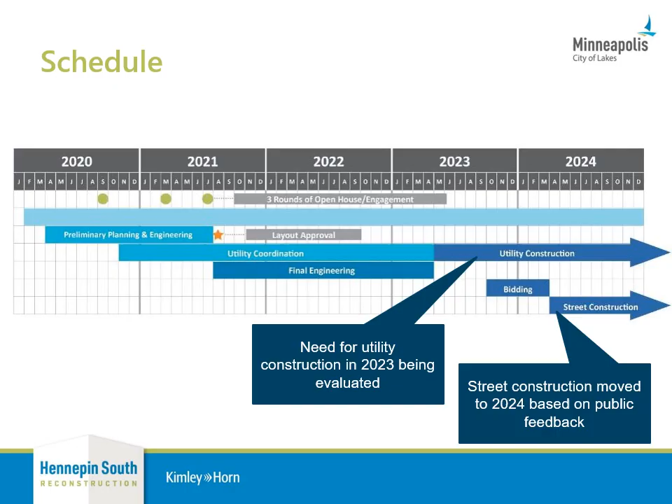Beginning with a brief recap, this is a reconstruction of Hennepin Avenue from Douglas Avenue on the north to Lake Street on the south, about a 1.4-mile segment. Hennepin Avenue is the ward boundary between Ward 10 and Ward 7, with Ward 7 on the west and Ward 10 on the east. There are 3 neighborhood organizations that directly abut the corridor, 2 special service districts that serve the businesses along the corridor, as well as 1 business association. There are varied stakeholders, including commercial users, residents, and many others that currently use the corridor as a means of getting to and through the city.

The Hennepin Avenue reconstruction project objectives begin with improving the sidewalk and intersection for all users. This includes installation of durable pavement markings at crosswalks and supporting pedestrian activities along the corridor with space for plantings, landscaping, and furnishing zones where feasible.

The recently adopted Transportation Action Plan identifies Hennepin Avenue on the pedestrian priority network. Evaluating bicycle network connectivity, the city's Transportation Action Plan identifies Hennepin Avenue between Franklin Avenue and Lake Street as a near-term, low-stress bikeway on the AAA network.

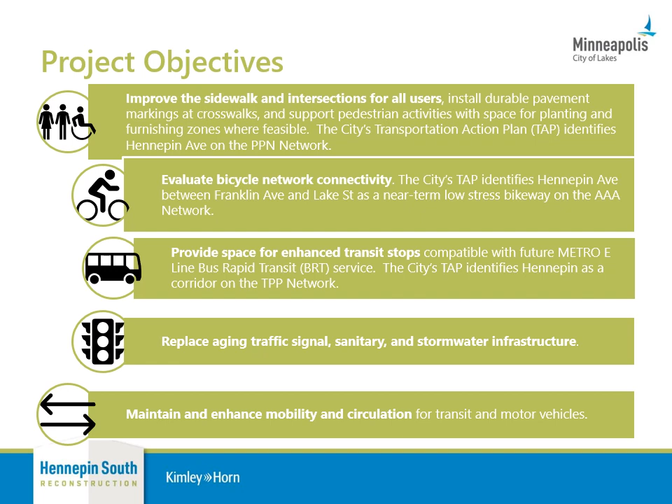Providing space for enhanced transit stops that are compatible with future Metro E-Line bus rapid transit service, the city's Transportation Action Plan also identifies Hennepin as a corridor on the Transit Priority Projects network. Objectives also include replacing aging infrastructure, including traffic signals, sanitary, and storm, as well as maintaining and enhancing mobility and circulation for transit and motor vehicles along the corridor.

In 2020, we had our first round of engagement via open house meetings in the month of September, with a public comment period that extended into October. We had a total of 120 individuals that attended the 2 open house events.

In terms of the live meeting questions and comments, topically, bicycle facilities received nearly a quarter of the questions and comments during those meetings, with some in support and some against the implementation of bicycle facilities as part of the project. There were also questions regarding vehicular traffic at 16%, including questions about maintaining and reducing the number of through lanes along the corridor.

Pedestrian and business parking came up at 13%. There were questions and comments about improving pedestrian infrastructure and how we intended to do so, as well as questions about whether we were going to be retaining curbside parking and loading as part of the redesign of the corridor.

There were other comments that came in regarding transit, our complete streets policy, as well as streetscapes, assessments, and construction-related questions. In addition to the 2 live open house events, we also had an interactive map available for public comment on the project website through October.

In terms of the comments we received, nearly 770 comments. Just to highlight a few: pedestrian safety and access came out at nearly 41% of those total comments. Bicycle facility and access came in at 14%, with transit service at 13%. There were other various questions regarding parking, deliveries, streetscapes, sidewalk cafes, and green infrastructure.

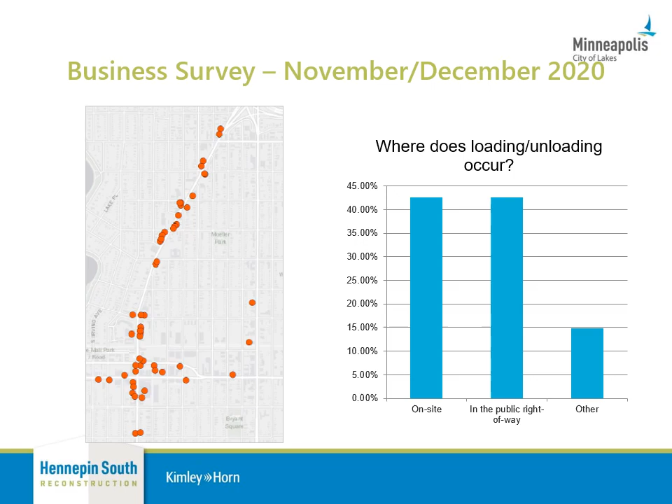I'm going to turn it over now to Alan Klugman to talk through some design options and analysis.

Thanks, Becca. In a few moments, we will go through 2 layout options in some detail. But before we do that, let's recap how we got to this stage of our layout development work. Those of you who attended the September open house know we are strongly focused on meeting city policy goals through our design effort. Over the past few months, we have worked with these goals and come up with findings on what it means to implement major city initiatives in this corridor.

Let's review some of those key findings. First, we'll look at pedestrian space. A lot happens in the pedestrian zone, and we have determined that to fully meet our PED objectives, we desire to have 14 feet of pedestrian space on each side of the street. In a moment, I will illustrate that.

Another key element is how we enhance transit, one of our prime objectives for this project. We have concluded that to fully support transit, we will propose full-time transit lanes in each direction. I'll also have more on that in a minute.

As we look at bike treatments in a corridor like this, we know that any bikeway would need to be a protected facility. In layout option 1 that you will see shortly, you will see a 2-way protected cycle track along Hennepin Avenue. Now, one of our themes in this project is that it is difficult to fit all of our desired modes and services within the available right-of-way. You will also see a layout tonight called option 2, where we do not provide a bike facility along Hennepin.

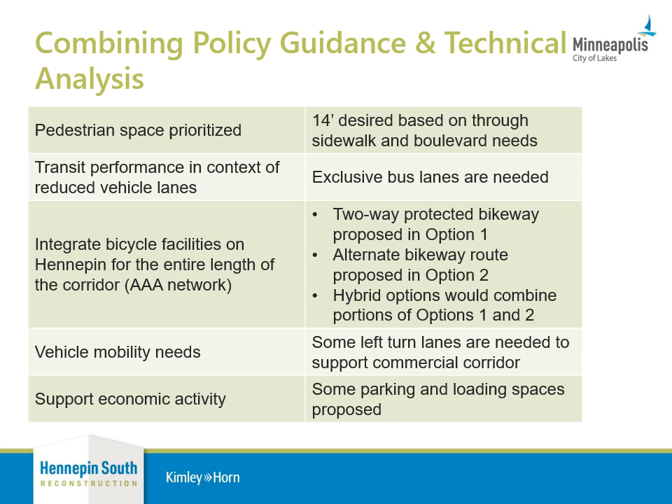Quickly reviewing some of what I just went over, let's look at this slide. When we talk about the pedestrian space, and you'll recall that I said we were aiming for 14 feet, a lot goes on in this zone. In addition to the walking space, it also includes the furnishing and amenity zone, space for planting, greening, and stormwater management, areas to accommodate bus stations and passenger loading, and even room for the mundane necessities such as signs and light poles. So we really want to keep our pedestrian space as large as we can.

I also noted that we are recommending full-time bus lanes in both directions. That's something new, so let's talk about why we think this is so important. First, Hennepin is one of the key links in our overall citywide transit network, and its importance is only going to grow in the future when the E-Line Bus Rapid Transit, or BRT, arrives in a few years. We are committed to maintaining good travel speed and high reliability for the buses in this corridor. When you see the layouts for Hennepin, you will see that we are proposing a reduction in the total number of lanes for general vehicle traffic. That strongly matches our policy goals.

Now, if we intermix buses in this new reduced section, that could provide further challenges for transit travel time. And as we study bus volumes and passenger counts along Hennepin, we see that the need for reliability extends throughout the day. Bus travel is not only a peak period occurrence. And one thing we know about bus rapid transit, both from the lines we now have in the Twin Cities and from other examples nationwide, is that BRT systems attract strong ridership all day. In fact, we forecast that daily bus passenger counts along this corridor will grow from 6,600 riders today to 14,000 with the new BRT system.

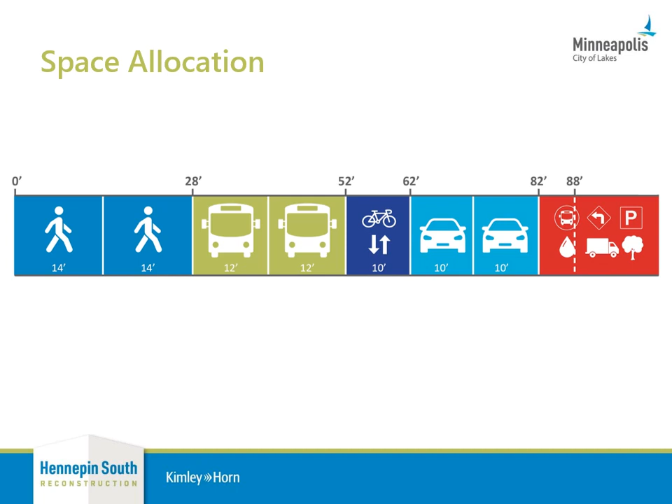Moving from a graphical representation like this to an actual layout design that we can build is our next step. And at this time, I will turn the floor over to Jonette, and she will describe the two leading design options that we have developed for this corridor.

If you participated in Open House number 1 in September, you might remember that we showed option 1 with one-way sidewalk level protected bikeways on each side of the street. As we laid out that typical section along the corridor and tried to fit in all the things that Alan mentioned, space for greening, parking and loading, left turn lanes at key locations, bus stop amenities, we found that we needed every foot available in the right-of-way.

You can see that we tightened up the transit lanes by 1 foot on each side of the street and also changed the bikeway to be two-way on the east side of the street, which provided another 2 feet. When you take a look at the layouts, you will see that that additional 4 feet becomes very important on the layout with the bikeway.

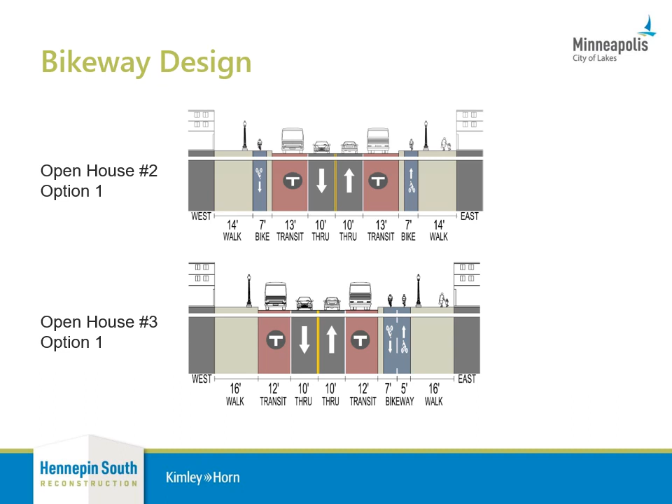We put the bikeway on the east side of Hennepin Avenue because even with potential driveway consolidations or modifications, there were fewer driveway conflicts on that side of Hennepin Avenue and also better connections to the bike facilities on Franklin, 24th, 26th, and 28th.

Based on the city's policy guidance and the technical analysis over the past few months, we have narrowed down the numerous potential cross-section options to two main design options. We have laid out those options onto the full corridor from Douglas Avenue to Lake Street to provide enough detail for you to see how that design would translate to each block in the corridor. These are still early in the design process, so there are some elements that will need refinement or further analysis going forward.

However, the intent is to provide you with enough detail about each option so that you can provide meaningful comments as we work towards identifying a preferred option for the corridor. The Option 1 layout has a bikeway from Franklin Avenue to Lake Street and is similar to Option 1 that was shared in September. It has 8-foot through sidewalks on each side of the street, a two-way bikeway on the east side of Hennepin, 2 full-time transit lanes, and 2 vehicle lanes. It also has a median through much of the corridor, which I will talk more about in a few minutes.

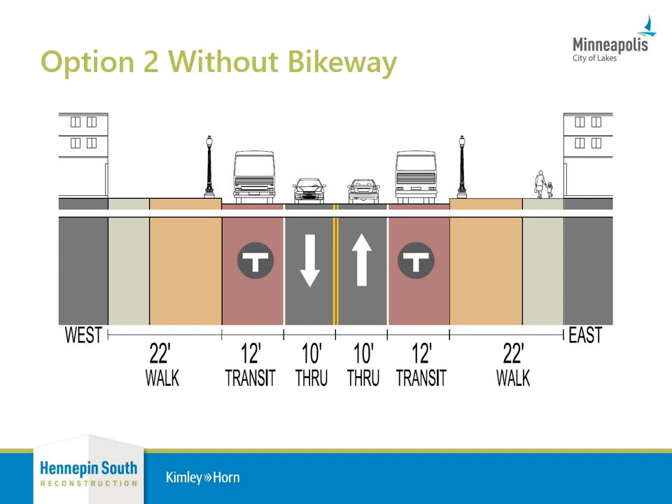Next, we have option 2, and the main difference here is that there is not a bikeway on Hennepin Avenue between Franklin Avenue and Lake Street. As a result, the option 2 layout has more boulevard and furnishing space compared to option 1. This has implications on the amount of space for elements such as greening in the corridor, sustainable stormwater features, and opportunities for parking and loading spaces on Hennepin Avenue.

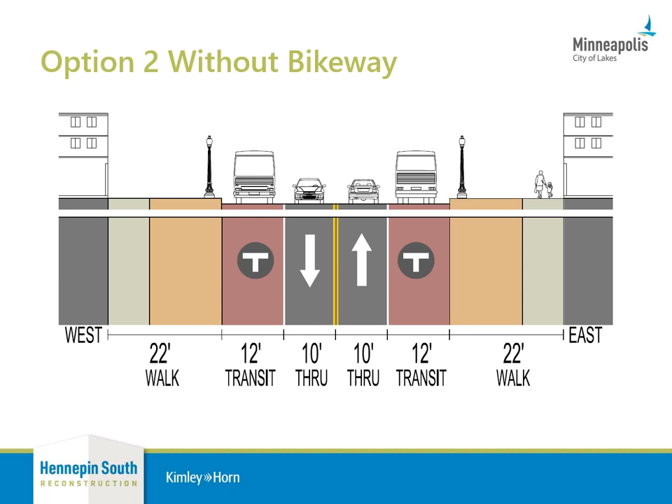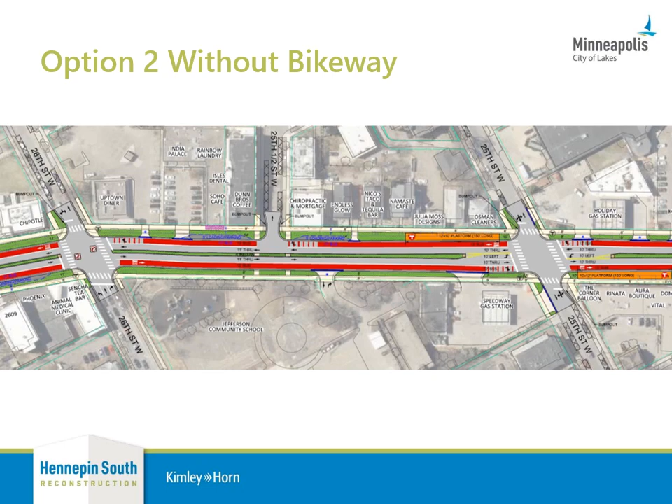Here is a snapshot of the layout for option 2. As mentioned, this option has more opportunities for potential parking and loading on Hennepin. We have included these spaces in the layouts based on the activity that we know happens in the corridor today and is needed to support the numerous residences and businesses. We know from experience on Hennepin, as well as other corridors, that if there isn't space provided for these activities, then people will stop in the transit lanes instead.

If a bikeway is not provided on Hennepin Avenue, then the city would look to improve the bicycle facilities on another parallel corridor, such as Bryant Avenue, with improved east-west connections between that corridor and Hennepin. The selection of an alternate bikeway route would consider the relative benefits to people biking, as well as the costs and impacts on those streets. The impacts would include on-street parking and vehicle circulation.

As part of this round of engagement, we are showing one layout with a bikeway on Hennepin Avenue between Franklin Avenue and Lake Street, and one layout without a bikeway. There are multiple hybrid variations that could have a bikeway on a portion of the Hennepin Avenue corridor. Some of those hybrid variations were shared in the previous round of engagement, and those variations are still on the table as possibilities.

Next, I want to highlight a couple design elements on the layouts and the differences between the two design options. The project team has been coordinating with Metro Transit on the placement of bus stops on the corridor. Based on this coordination, both layouts show E-Line BRT stations at Franklin Avenue, 25th Street, and Uptown Transit Station. Those stations will serve both the E-Line and local bus routes.

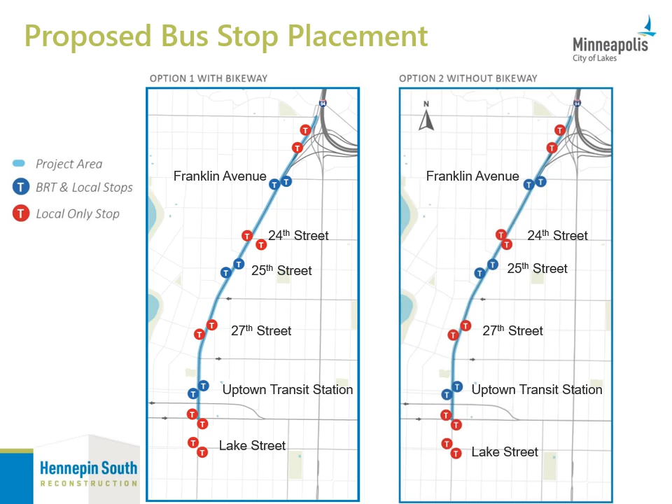Both layouts show left turn lanes at key locations in the corridor. Based on existing traffic patterns and to provide opportunities for left turns every few blocks, left turn lanes were recommended at 22nd Street, 25th Street, 28th Street, Lagoon Avenue, and Lake Street, which is what you will see for the layout for option 2 without the bikeway.

On option 1, the left turn lanes did not fit within the right-of-way at 25th Street, where there are also BRT stations. As a result, in the option 1 layout, the left turn lanes were relocated from 25th Street to 24th Street and 26th Street instead.

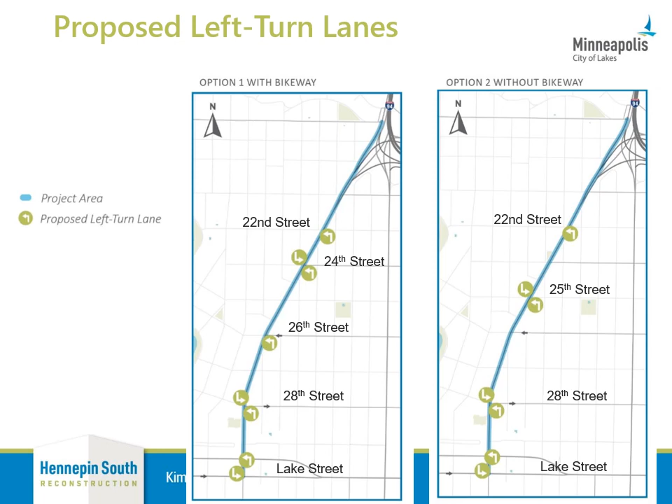Where left turn lanes are not provided, left turn movements would be restricted during some period of the day. Almost all these intersections currently have left turn restrictions during peak periods, such as 7 to 9 a.m. and 4 to 6 p.m. With one vehicle lane in each direction, those left turn restrictions would need to extend over a larger portion of the day, for example 7 a.m. to 7 p.m. The exact hours of the restrictions still need to be determined.

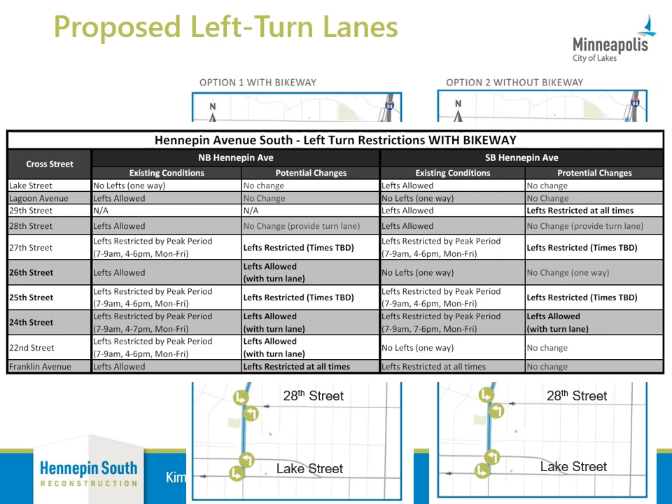On the layouts, you will see a table near the bottom that summarizes the existing left turn lane locations, the existing left turn restrictions, and the potential left turn restrictions for each design option.

Medians are shown for most of the corridor on both layouts. These are being proposed to improve both safety and operations. Vehicle turns into driveways, especially left turns, create conflicts with pedestrians on the sidewalk as well as people on bicycles. By making all movements into the driveways right turns, drivers don't have to find a gap in oncoming traffic to make the left turn. The medians also make the one vehicle lane in each direction work more efficiently.

If mid-block left turns were allowed, they would have safety issues as mentioned, but also result in vehicles backing up, or more likely bypassing the left turning vehicle using the transit lane.

The project team is currently discussing modifications to driveways with property owners. The modifications include narrowing some driveways, consolidating the number of driveways where there are multiple access points to one property or to adjacent properties, and closing driveways that are either unused or through redevelopments that are occurring. The locations we are currently talking to property owners about are shown on the layout with an asterisk. All of these changes reduce conflicts and improve the space for people walking and biking while maintaining access to properties and smooth traffic flow.

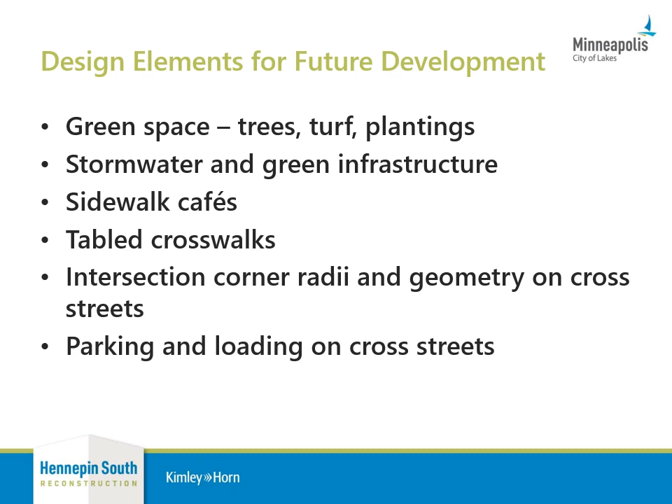Finally, there are some design elements that we want to acknowledge that either aren't on the layout yet or need additional refinement and detailed design work. These are elements that are important to the layouts and will continue to be explored as the design process moves forward. We will have more detailed information about these elements later in 2021 as a preferred alternative is identified and as additional design details are developed.